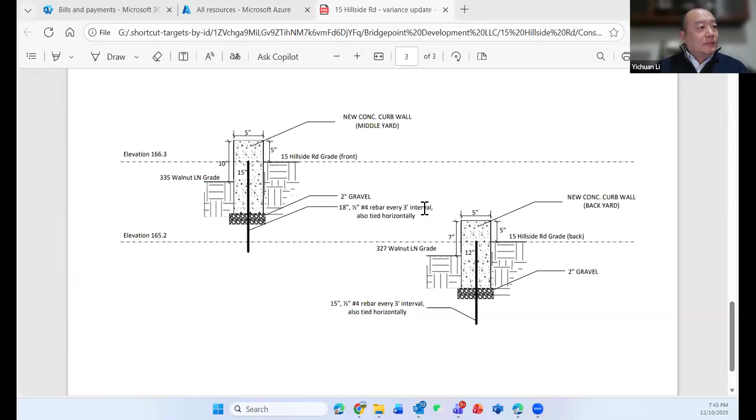So as you can see, I'm going to show you the existing conditions. Starting from here toward the property line in front, there's already an existing curb wall from the previous owners. What I propose is to extend this concrete curb wall all the way to the back of the property line.

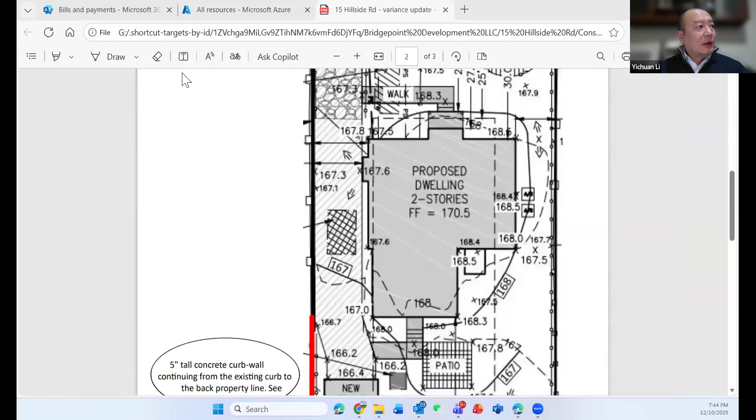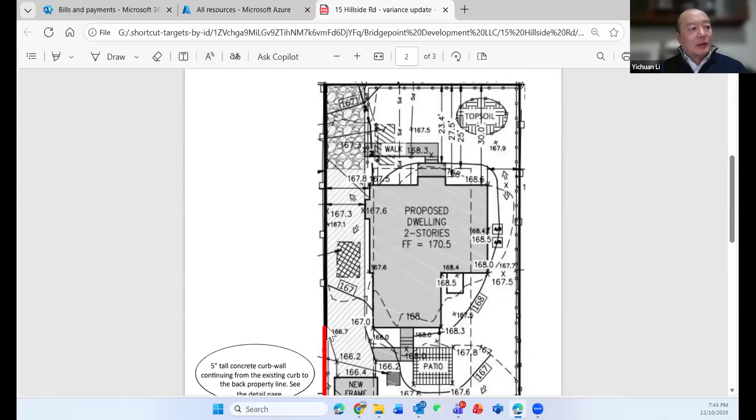That way it could divide the two properties so it can contain the stormwater in my backyard. If you look at this survey, this red line represents the new curb wall I'm going to install, starting in the middle of the yard. The front black line is the existing curb wall, and I'm going to extend it all the way to the back.

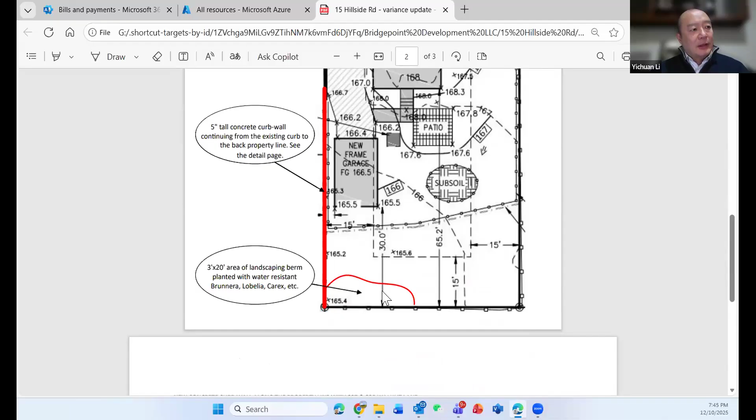I also took the recommendation from the township site engineer to install a 3 foot by 20 foot landscaping berm. This berm will have water-loving plants planted so the water can also be absorbed by the plants in the back, becoming a landscaping feature so that the water will contain within my backyard.

This is the detailed design - we're going to put about a 15-inch tall concrete wall, about half of it buried into the ground, with rebar sticking every 3 feet into the soil so it can hold the concrete wall. That's the engineer's design, and we sent it to the neighbor, and the neighbor seemed to like the idea.

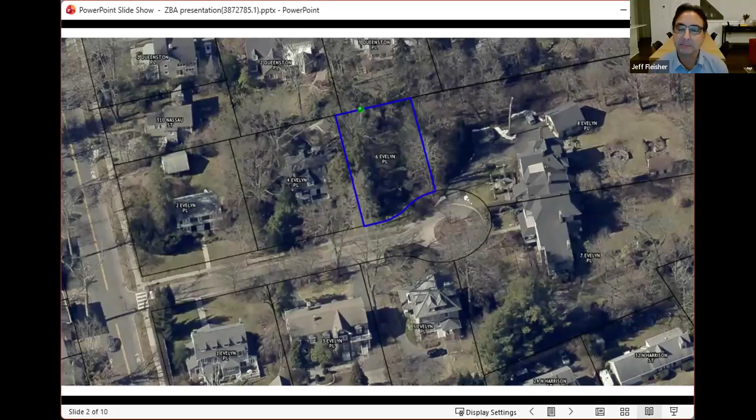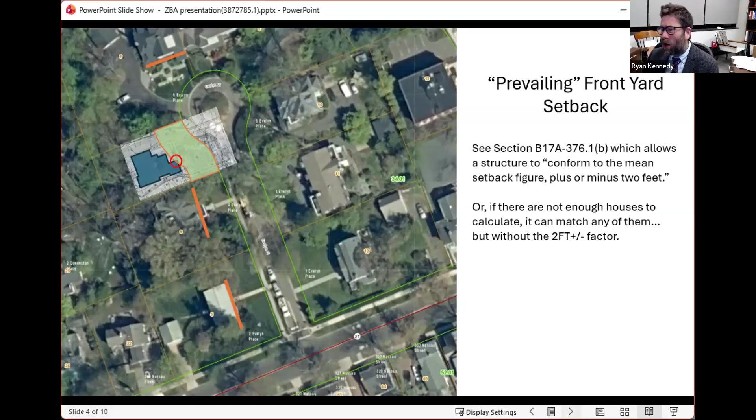So when we talk about violating the front setback, we're not talking about the entirety of the front of the house so much as a corner or part of it. Is that right? That's right.

Now, I noticed that where the other part of the front of the house is actually set behind that 33 feet, could this part of the home have been built closer to the street?

Yes, you could have filled in that triangle there. Yes, but...

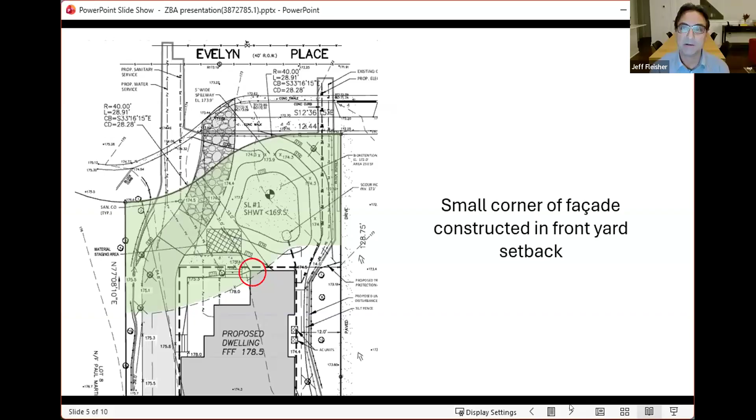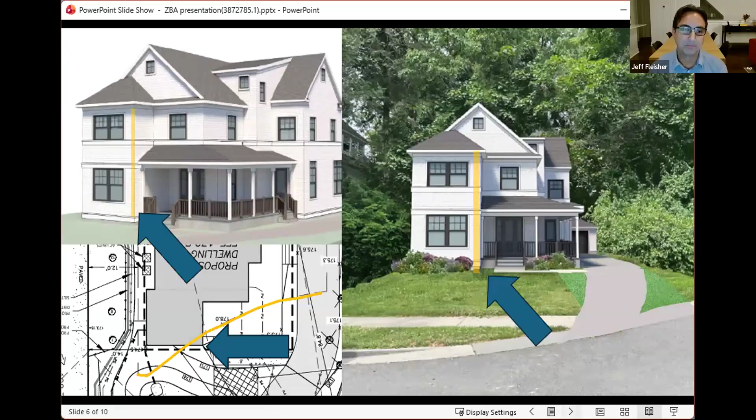Maybe you could just briefly say if we were to alter the front, what that might mean, what you'd have to do to do that. Well, from the foundation up, you'd have to cut that corner as well as the roof.

And the type of foundation this is, maybe you could describe that a little bit, how this was done. It's a prefabricated foundation that's brought in and placed on site. So it would have to be pulled out and remanufactured in a shorter distance.

And looking on the left where the map shows what is into that front yard, it looks like that front porch is in the front yard, but that's there because front porches are meant to be and permitted to extend into the front yard setback.

Yes, they are. So, put another way, the way you designed the house was to follow that line and actually make the porch appear more prominent. But ultimately, that is permitted, while that sliver of the front part of the first and second floor room is not. The house itself is not allowed.

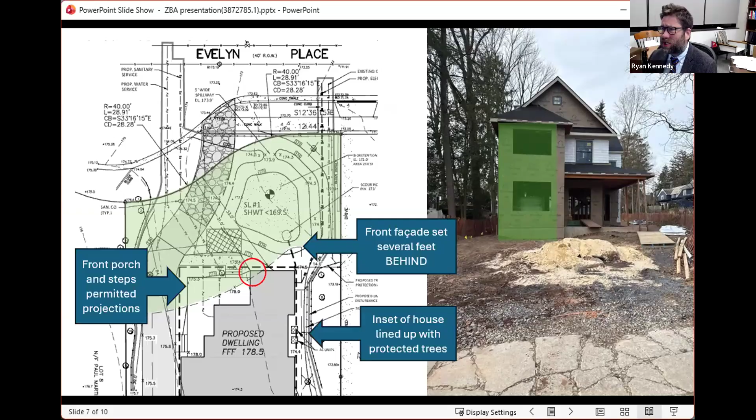Maybe speak a little bit, I know a lot of work went into protecting those roots and carving around them. I heard a term often but never really seen one in action, but essentially air spades were used to make sure the roots were protected, as opposed to trenching or cutting them.

Yes, they did take great care, and I know they worked even with the neighbor to make sure that they saved as much of the root system as possible.

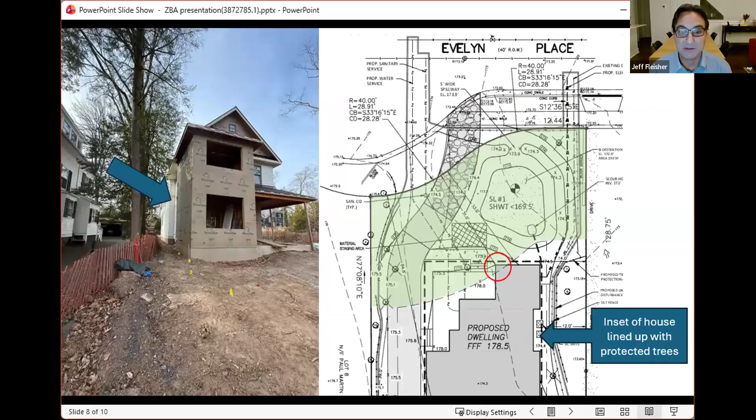Here's another view, kind of towards that corner, but again you can see what's built. That 2 feet we're talking about is that highlighted corner of the frontage of that portion of the house. Is that right? That's right.

Well, I don't know if anyone has any other questions for the architect, other than a brief summary. That is our intended direct testimony. I'd like to be able to summarize briefly before we finish up, but I'm happy to yield to any questions. Thank you, Mr. Kennedy. Any questions by board members?

I have a question. Exactly how big is that corner, is it a foot? Well, the 2 legs would be about 2 feet each, yes, the 2 legs of the triangle, if that's what you're referring to. Yeah, I think so.

All right, thank you. Any other questions? Steve, I have a question. Sure, Donna. The trees you're talking about, gentlemen, are these trees on your property or on the neighbor's property? They're on this property, but very close to the property line. Okay.

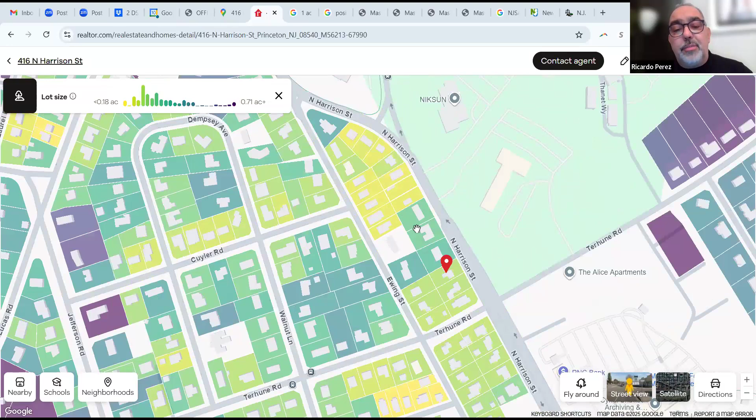Thank you. This is just to show the general location of the property in question, here with the red dot, 416 North Harrison Street. You can see the yellow properties at the bottom are similar size lots, about 75 feet. They're all undersized. A few lots to the north are slightly larger than 85 feet, but most of the lots are 75 feet or smaller, even getting smaller at this end. So we're surrounded by a lot of small lots in this area, just to give you context of the overall location.

My next exhibit is Crest Engineering's drawing submitted for approval, dated 4/25. I'll start with their existing drawing to give you an understanding of the existing site. What we're proposing is to take out the carport and the one-car garage and add an addition on this end.

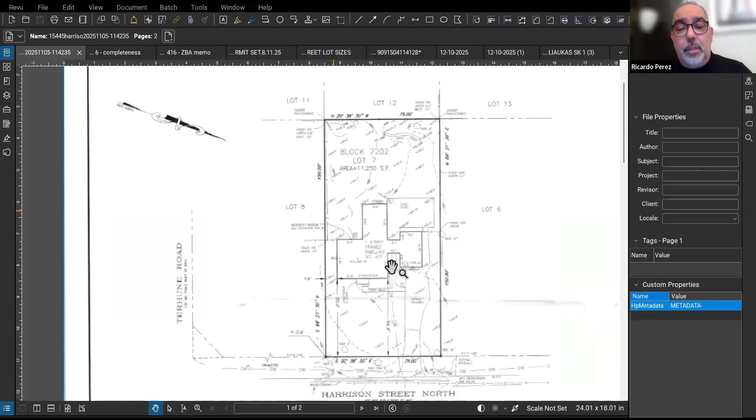So this is the existing site plan as submitted from Crest Engineering, showing the existing house and footprint. We're not changing the footprint except for knocking down the one-car garage. The vestibule is coming out, and there's a new addition in this corner. We're maintaining the front yard line, so there's no change to that for the new house.

Here's the proposed house, and here's the addition. This is the existing footprint, although we're rebuilding it, but this is the additional footprint. This is within the setback, so there's no variance required there. And this is the overall site plan.

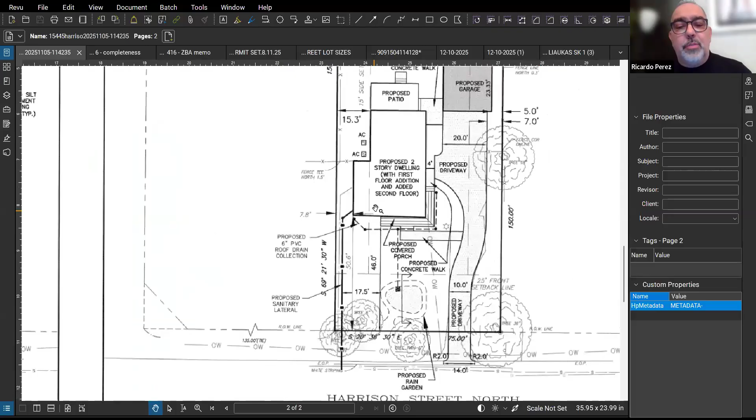So we're here today for one simple thing: we have a non-conforming 75-foot lot where 85 feet is required, so our frontage and required widths are both short. There are no other variances except for the existing condition of this part of the building, which encroaches on the side yard. That's an existing part of the building being maintained; the rest of the construction will be new. We're here today because of the fact that it's a non-conforming lot.

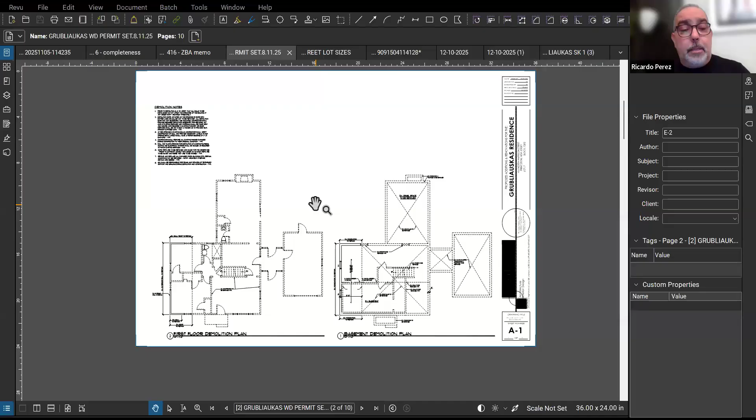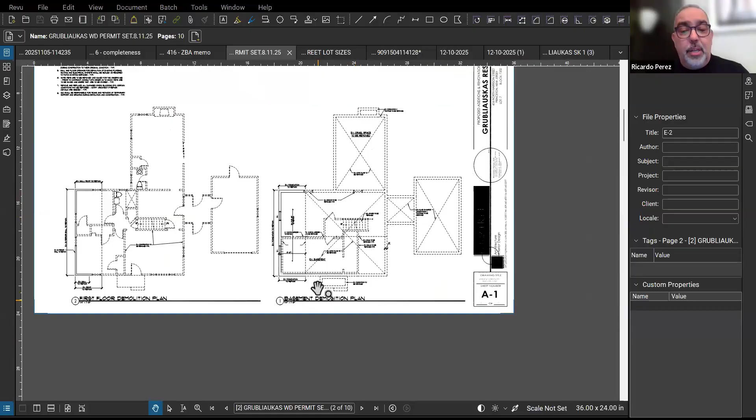So you can see what we're taking away from the house. The reason we decided to take away most of the basement is because it's structurally unsound at the moment, it's leaking water. This home was built in 1950, and the ground outside was not well maintained, so there's a lot of damage to the existing foundation. We attempted to repair it, but it wasn't cost effective, so we're hoping to replace it. In replacing it, we're going a bit deeper because the current basement height is only about 6 foot 6, which is very shallow and doesn't meet occupancy requirements for today's modern homes.

So the new home, just to show you the floor plans, is a modest home, about 2,500 square feet. You can see the front elevation facing Harrison here, and it's in keeping with the rest of the neighborhood. This is the existing portion of the building here; we're hoping to replace the foundation under it because it's also in bad shape, but that's the existing portion.

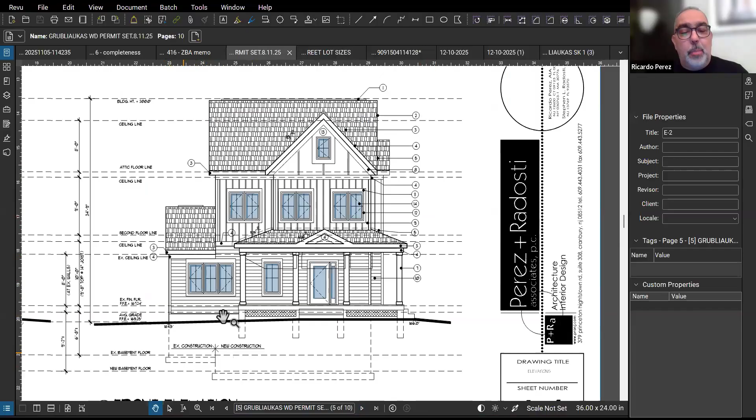In short, this is basically a lot that's too narrow for the existing conditions. Had we not been building a new home, we would not be before this board. There are no other variances required for this property that we're aware of. The variance will not harm the public good or zoning plan in any way, and is the only necessary relief for this project. It's also part of the Princeton master plan to reduce the cost of development and increase investment by streamlining review, permitting, and approval procedures—exactly what we're doing here tonight. So this would be in keeping with the master plan, as well with items M and possibly G of the Municipal Land Use Law.

G is to basically provide sufficient space in appropriate locations for a variety of uses, to short list: residential, commercial, industrial uses, and open spaces, both public and private. And M, to encourage coordination of the various public and private procedures and activities shaping land development, with a view of lessening the cost of such development and to the more efficient use of land.

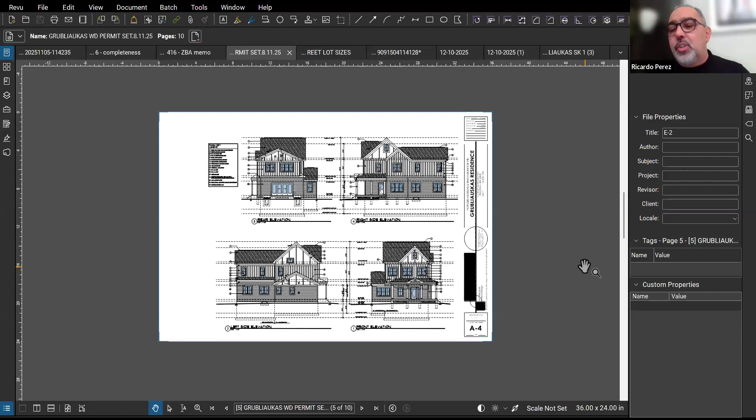So hopefully this is your easiest application of the evening. I have a lot more drawings and exhibits, but I think this is a pretty simple application, and I'll take any questions from the board or anybody.

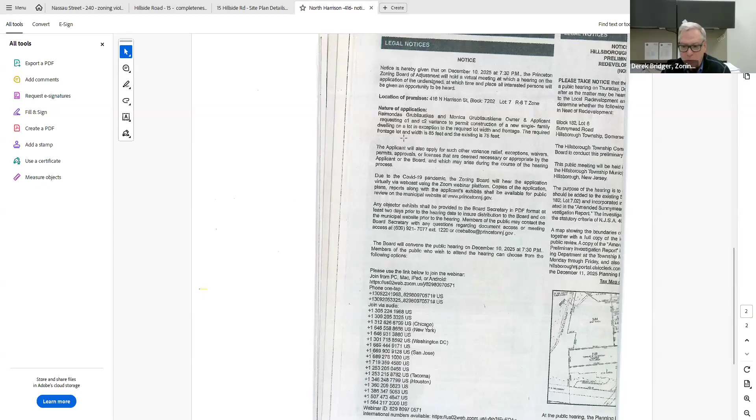I don't know how you do that. Well, just like when we raise houses, we hold it up in the air and we build a new foundation below it. It's kind of the circular argument why we got here, because the whole foundation - you were going to save the foundation before and we weren't going to call it a new home, but now that's correct, it turned into a new home, and that's why we're at the variance meeting.

Well, we've got the notice on the screen, and yes, they did ask for any other variance relief deemed necessary or appropriate by the applicant or the board, which may arise during the course of the hearing process. So I guess the only question is for the neighboring property.

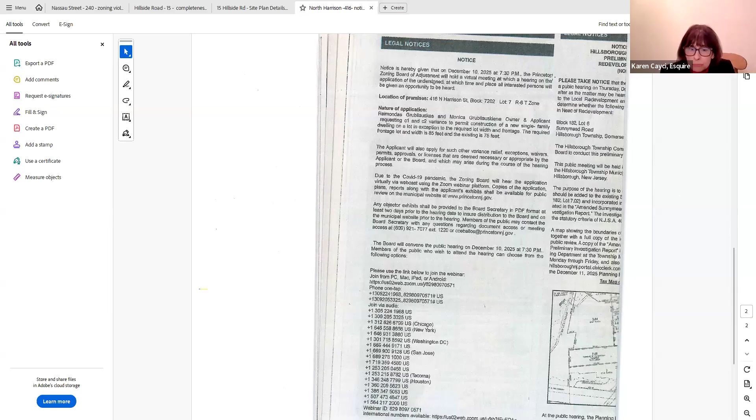Now there would be an encroachment into their side yard, and they didn't get notice of it. So there's a question of whether technically the board could go ahead and grant it, balanced with whether the board thinks it would have been appropriate for the neighbors to know about the encroachment in the side yard.

I think before we decide, Karen and Derek have to tell us whether we could do it. I mean, it would have been cleaner if they'd noticed for it. At the end of the day, there'll be excavation 7 feet from the property line versus the 15-foot foundation they're going to dig now. So it's a tough call.

Yeah, I kind of did give my summary as far as the lot being an existing non-conforming width and frontage. There's an existing side yard encroachment that's grandfathered in. We are asking for relief of the 85-foot requirement in lieu of the existing 75-foot on the lot. The variance will not harm the public good or the zoning plan if given. It is the only necessary relief for this project.